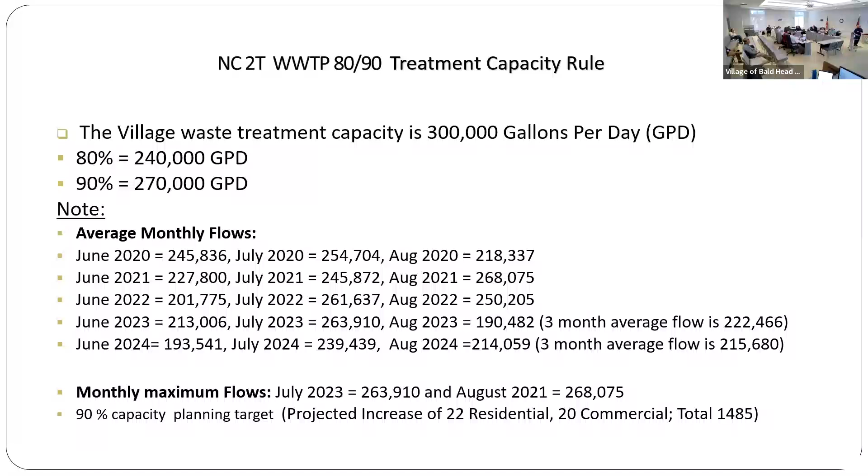Here you can see the percentage, 80% in the top slide for 2020, and then we've come down to 72% for '24.

Also, you'll see the notes off to the side. Our average is for 3 months. I have that document here, where we've agreed with the state that we would look at our highest 3 months of the year because of being a seasonal facility. Though we have a year-round population, we only gauged our highs by that. We would never exceed the 80/90 rule, and in all fairness, we could exceed it in the summertime and then have to all of a sudden have a moratorium on top of us.

We don't want to do that. So what we do is we guide ourselves with the highest 3 months of the year, which is June, July, and August.

We've been working on the premise that there's about 35 REUs per year. This year we broke that, we're at 42. Just for general knowledge, the reason we exceeded that was because of the current commercial development and those additional REUs, or we would probably have been under the 35.

We are approaching 90%. One other thing to mention, yesterday Tony talked about this last bullet here, the expansion permitting window.

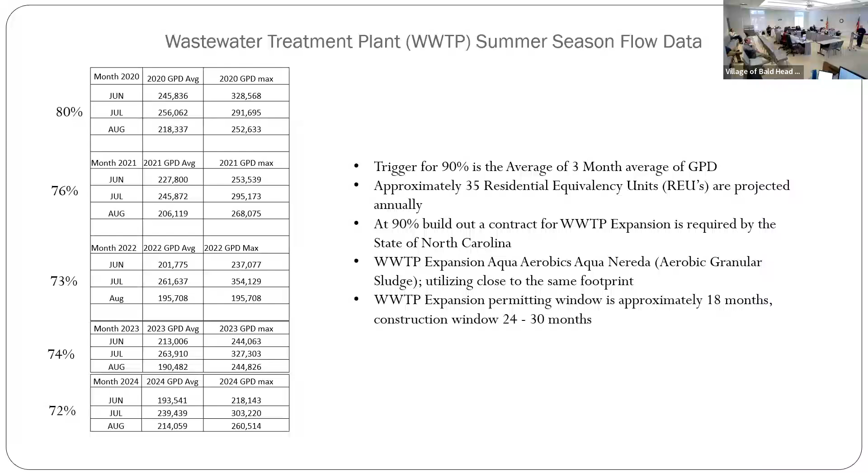We're going to start reporting average flows for the wastewater treatment plant monthly, as requested. But this is our start, just to give you an idea of where we are, where we've been since COVID. Any questions?

Yeah, just on permitting. So at 80%, we have to be under design. At 90%, we have to be under contract, awarded bid, construction.

So hypothetically, we don't hit 90% for 5 years, we're sitting on our design. I mean, we pulled the trigger, but we had to. We pulled it back, but really concentrated in '22 because we thought our numbers were going up. And when I'm looking at '24, we're lower than we were in '20.

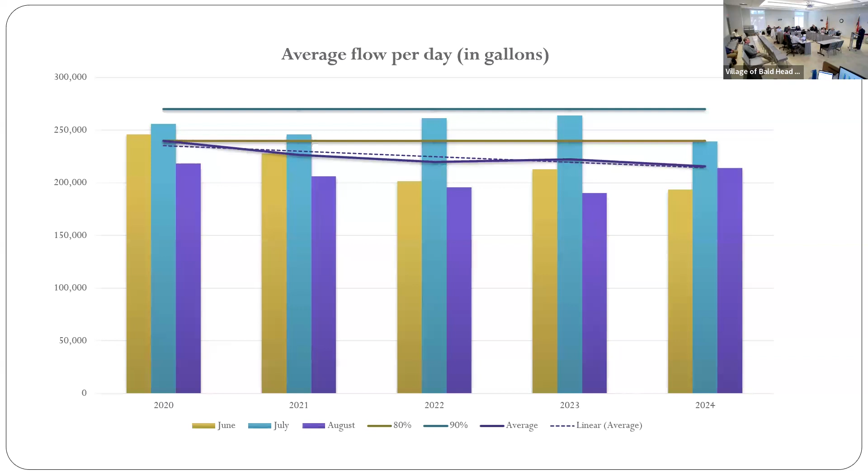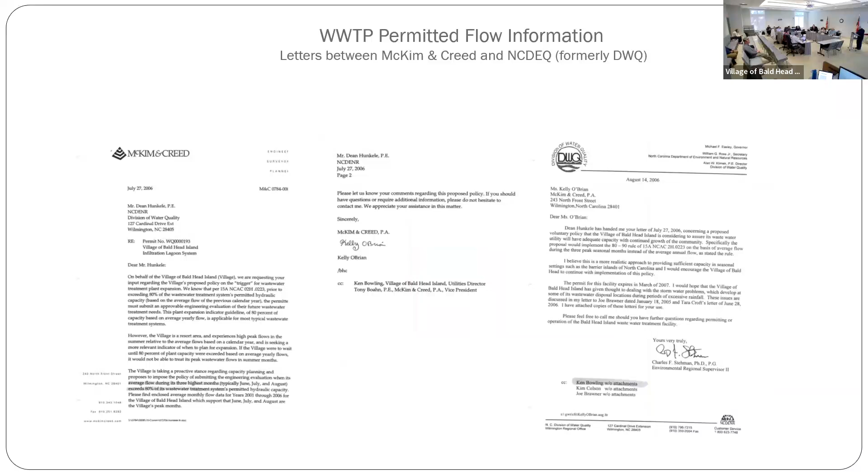Currently we're approximately 88 million gallons annually. And if we look at 2462, which is 2,462 REUs, we'd be looking at approximately 150 million gallons annually. That's what Jim was talking about yesterday, about us being able to make sure that we're being most efficient.

With what we have, and then see where we'll move forward in new well fields, technology. Eventually, maybe, we've been pulling from the freshwater aquifer lens on top. There are other options, we can go deep, desalinate. So there are other options in the future if we need them. And we also have the interconnect.

I like to keep that interconnect flow between 20 and 30%, keep that percentage the same. I've shared that with Brunswick County. That's where we'd like to stay moving forward. And of course, it's always there in case of emergency, which has come in handy.

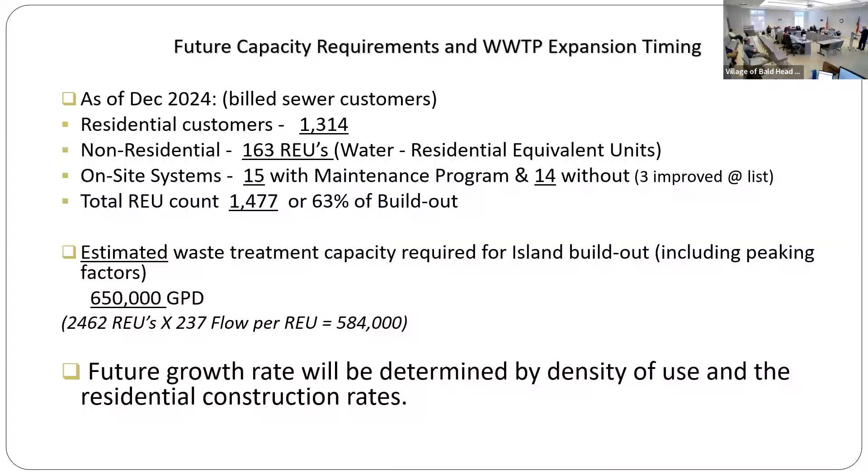Water capacity - I've covered most of this, but I had this slide to remind me about PFAS. We have done PFAS testing. I've attended all the state workshops DEQ has offered in Wilmington. We've done testing predominantly on the water side, but also some wastewater samples at the treatment plant, in the weir in the tertiary treatment area, just before it leaves the plant. We haven't done testing in lagoons or sediment, but we know we have high concentrations of both PFOA and PFOS at the tertiary treatment area, which naturally means it's out there. So the issue we talked about is real.

But if you think about it, PFAS is in everything - it's in packaging, it's in cosmetics. You take a shower, you rinse something in the sink. It comes from a lot of different sources, not only the source water.

Yeah, no, I get that. So we have a high concentration in our wastewater. Going back, we're doing a better job of testing at the tap to make sure we're not putting it out through people's tap water. Well, this is just another tap though, right? And in that tap, we are knowingly putting it in, and that's why we did highly concentrated testing there. We didn't test the outflow from the reject water from RO, but it's only a deduction. I understand, perfect, thank you.

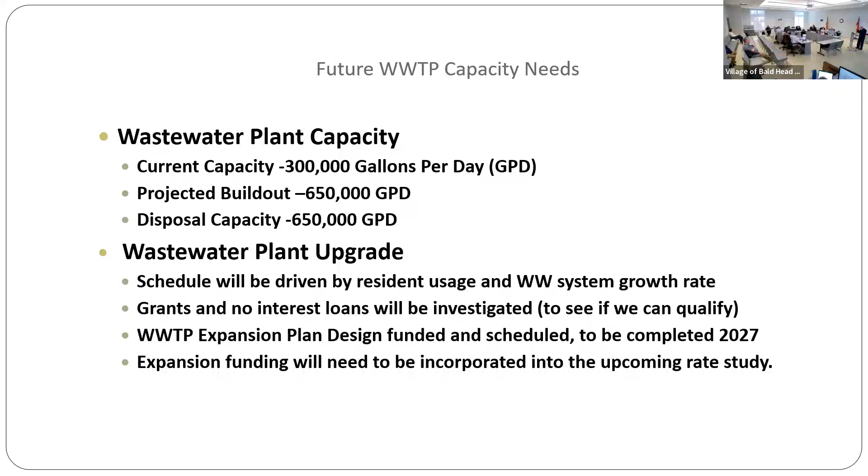Next slide, please. The next slide I'm gonna wait on, but can we go down to utilities capital needs? I think it's towards the end. Right there - now I gave away my whole slideshow.

Just to talk about utilities needs: we're looking at replacing the vans. We have gotten one pickup from public safety, thank you for that. These are some other items we'll be looking for - a confined space oxygen meter for confined spaces, primarily the lift station areas, Liberty pumps for lift stations, E1 and Barnes controls for the grinder pumps, and a reverse osmosis cleaning skid. We haven't had a skid replacement in a number of years - that helps us clean the ROs in the water plant.

We are trying to replace the balance of concrete in-ground tanks we've used from the old low pressure system, which we converted to wet wells for grinder pumps. We have no way of keeping those secure in a flood situation, and there are 40 or so of them. So we're looking at the Heritage floodplain wet well for those and the pumps that go with it. We want to take those 42, get a contractor, bid it out, and replace those 40 or so old concrete tanks with the floodplain wet well so we can control things during a high water situation.

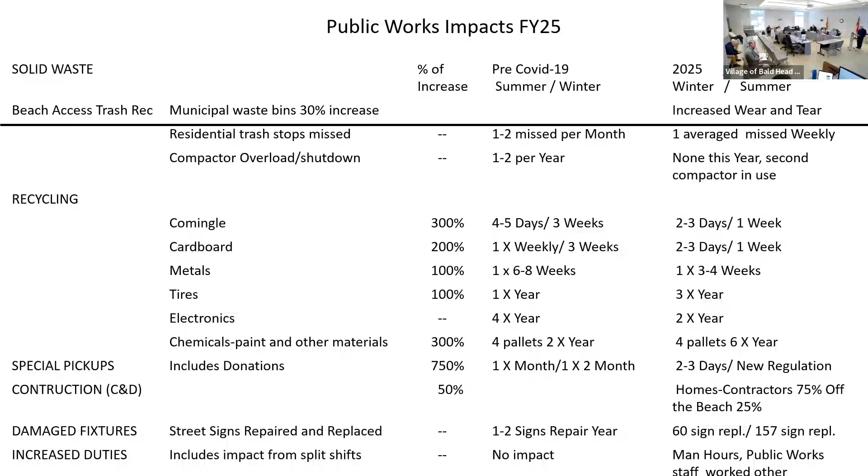Next slide, please. And the reason for that too is when we start talking about landscaping of parks and right of ways and things like that, I don't want to have that discussion.

This is the roll-off truck. I mentioned earlier about what we spend traditionally a year - about 200,000 a year on waste disposal of 40-yard and 30-yard containers outside of what we have, and then about another $120,000 a year on sludge removal. Two things the roll-off truck could do for us. The cost is about $280,000, which we split over a couple different programs, 140 apiece. And if you look at the public works wish list, there's also some containers, about another 40,000 to buy the physical containers themselves. So this was something we had on our vision board, and we continue to, and I'm bringing it back again during the budget season this year.

Any questions? Next slide, please.

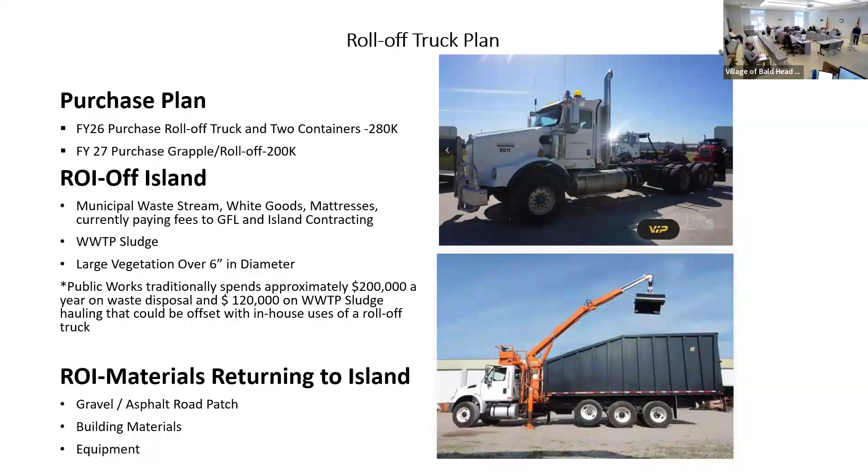When you do this work and decide what needs work, are you also looking at a schedule for digging up the road? Like if you're installing a new pump or something that would damage new pavement, are you coordinating this? This review's done annually, so it picks those things up - we don't add them in as they happen. I was thinking about the new pump, some kind of switch that was put in on Federal Road right at the corner to keep water flowing to the markets around here.

That will be done by a temporary patch - it's doing it as the compaction is good, and depending on weather. Generally for the bit that was compacted in lifts, it will be ready sooner than later as far as being temporarily patched, and we'll do that in-house. But we wouldn't want to be paving Federal Road in advance of doing whatever equipment you put in there.

Just from an aesthetic point of view, driving down Edward Teach, the view right down into that whole thing, and now we're talking about clearing it up even more. So looking in from this direction, I'm talking about the normal golf cart traffic going in front of public safety, and at some points you're just looking through the entire contractor service yard. There should be a vegetative buffer of some kind.

I'd just like to see that thrown into the mix somewhere too, out there or even near the back. We're just cleaning this up because we had to, it hadn't been cleaned out in years. We had to reshape it.

This is a stormwater containment area. It was so overgrown we couldn't get in there, so that's why we cleaned that up. Next is gonna be the tank area, really need to clean that up and take the old fence out of there that's been there.

I'm recognizing the need to do what you're doing, and I'm just looking at how do we introduce a buffer so that your need can still happen. I got it, but I'd like to supplement what we're doing in some way to create a buffer. It needs to be more hidden, like go to any major waste facility, anywhere you haul crap to.

It'll be landscaped in the front where the gate is, and then once you enter the property, you can't put lipstick on a pig. So buffering along Edward Teach to hide it, build a plan with some berms, some plantings or something, just along Edward Teach. I'd say on Federal too, toward the east end, because we did do some berms, but then there's a section that's still pretty open. Driving down this way, you can look into the property.

My thought process is more along where we have a handful of palm trees at the end of public safety right there, even landscaping closer to the public safety, that area that's wide open there, if we can, that'd be great.

You say natural or fencing? I'm saying natural. Anyway, we can easily plant that area more.

I think there's a whole other thought process that has to be added to what you're doing. We've identified it, we know what it is, and we've been concentrating on shaping this rather than any blinds or anything. They could happen simultaneously, but we've just been focusing on this, making it reasonable, now because of the money available and everything else.

So once the new gate is up there, then people wanting to dump in those dumpsters will have to come to current restrictions.

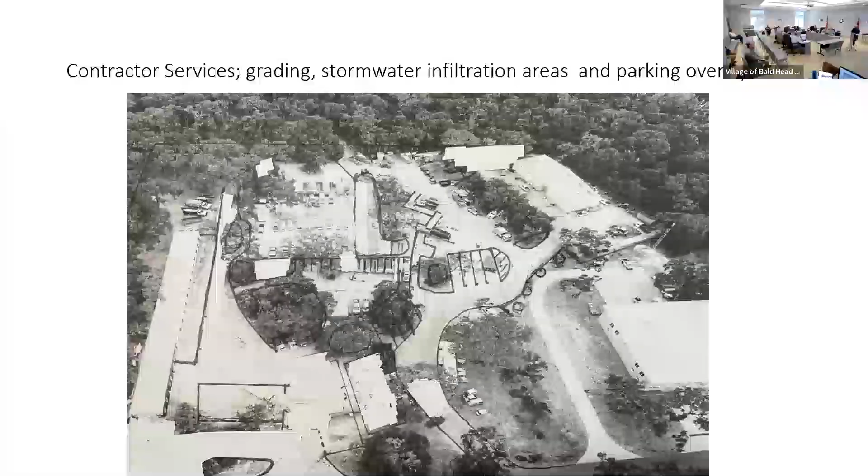Next slide please. We have the gas pumps installed, and you'll see more organization within contractor services, with both the poles and some of the ribbons on the ground designating spots. Once we get everything cleaned up, you'll see a lot more of this, and you'll see designated spots.

We are getting better at giving people assigned spaces. We are doing better at tracking people that are there, that come there overnight temporarily. Fuel pumps have been working well.

We have one more component that we'd like to install that would help on our side, and that's a patch between our bookkeeping system and the gas operation, diesel sales operation themselves. We continue to work on that with the vendors. It's been in their hands. We don't really have any control of that patch, but once that patch comes, it will help my staff be able to do less bookwork. The reconciling will be done automatically, go straight to the program, and that will help free some time up.

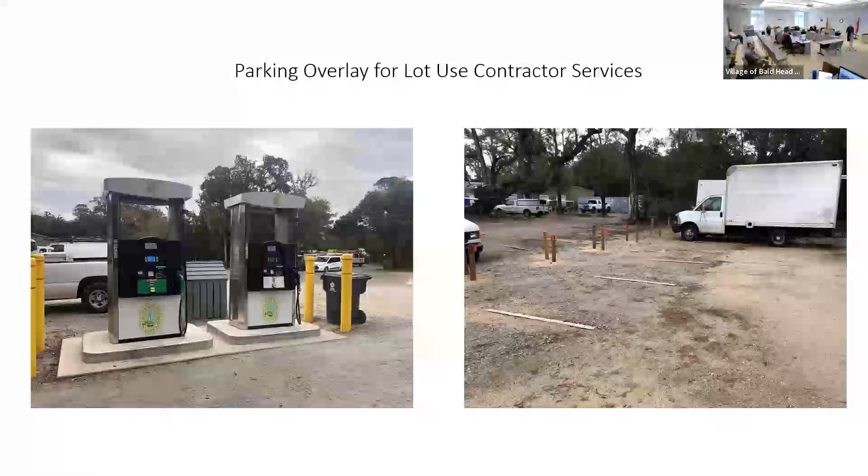Any comments about the beach access points? Concerns? Not about that, but it made me think of a question I forgot to ask earlier. I thought there was some discussion about getting some grant money for paving. Is that still an ongoing effort?

We were exploring funding and earmarks for that. We had a little bit of an update on that yesterday. But there's still some hope there because of access, I guess, use. There were some former senators, congressman excuse me, talking about it.

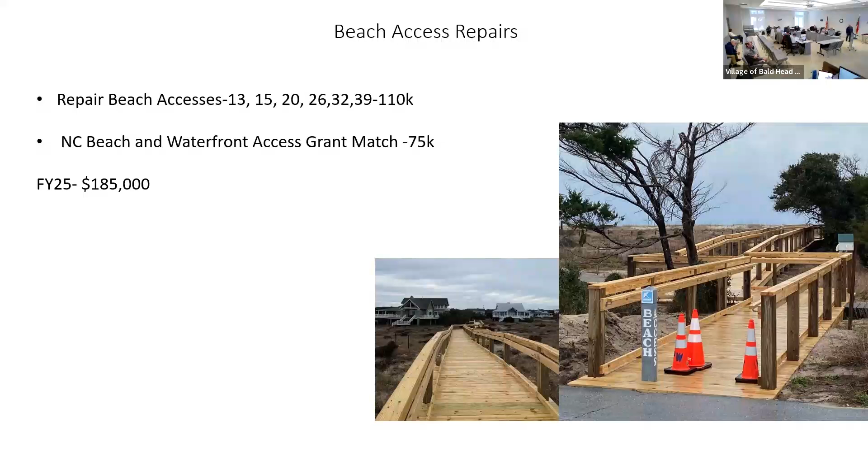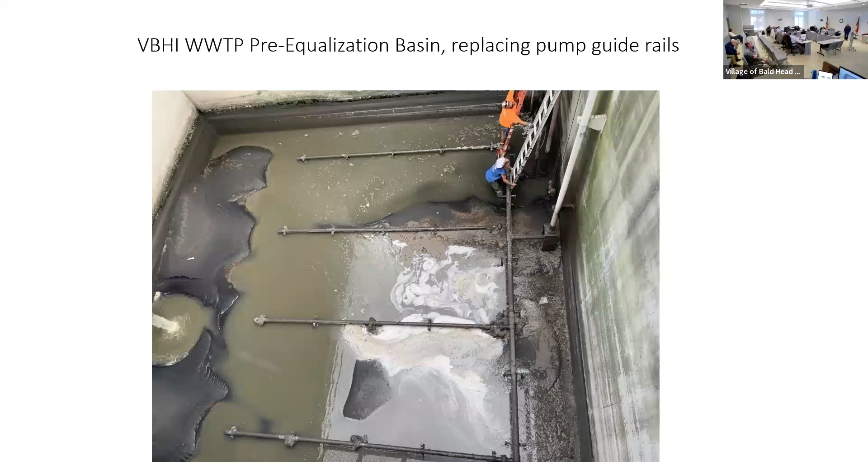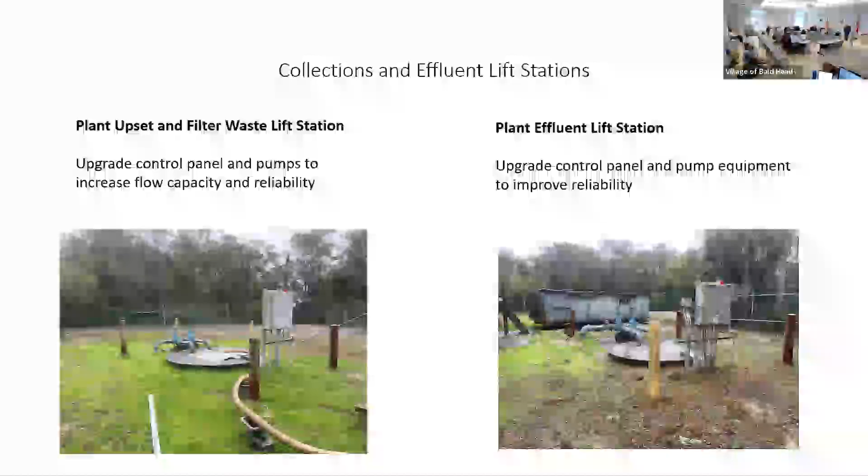Next slide, please. These are our two lift stations. This one is for the plant itself, and this is a distribution effluent lift station that sends stuff out to the lagoons. They are old, but they were able to keep up with 850,000+ gallons in that one day during PTC 8. They are still areas of concern that we'd like to work on that aren't right now included in the total price for the wastewater plant.

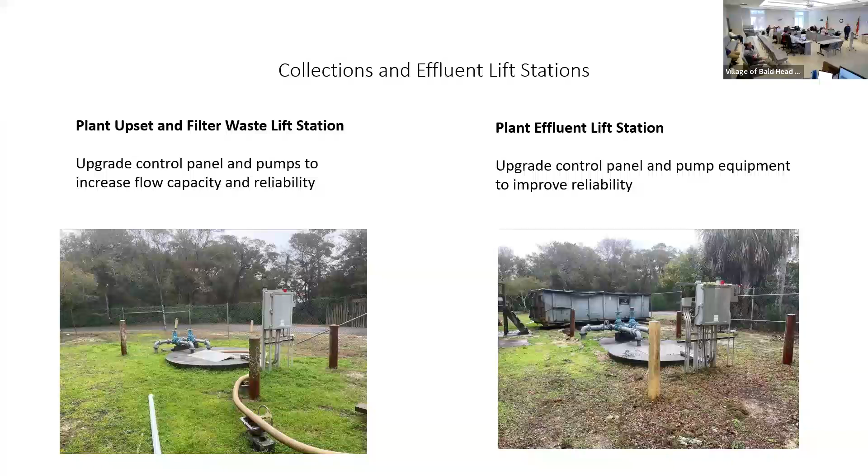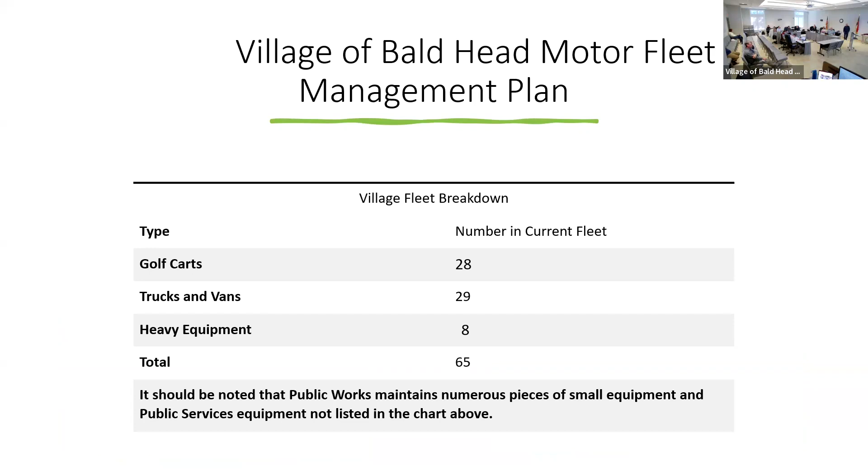Did you guys already go through the conversation with the review board? And have we talked to the chapel and the - I have not. Okay, so this is one of those, going back to communicating back and forth. The chapel and the lighthouse have the same fencing. For us to be replacing our fencing and not have them replace all the fencing, that whole area needs to be addressed. So that'd be a conversation.

Even if it's identical picket. I think they have an identical one. Yeah, I mean, even though we - if we - you're just saying for notification purposes, not necessarily. Yeah, notification, we're not gonna be doing - yes. No, but it would be a project that makes sense that it happens all at once for everybody. It's not cheap though. Yeah, I'm sorry, I don't know that, I think there's a notification to them that, hey, we're changing our fence. But I don't think, if we elect that that's something we want to invest in, I don't think we slow down or speed up because the chapel or the lighthouse wants to do it now or wants to do it later.

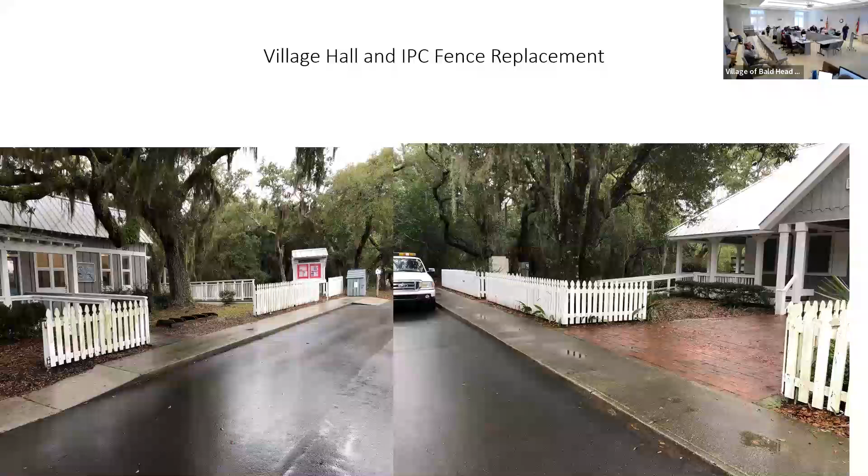Wayfinding program - we've been using the wayfinding program that was done a number of years ago. That seems to be working. We do get comments and we try to shift gears to address the comments as they come in. I've said in previous meetings, if anybody has any concerns or comments about the signage, please bring them to us so we can review them and make sure we're doing the best we can.

The roll-off truck is here because we help with different types of hauling, both on and off island. I didn't mention bringing stuff back, but yes, it can be used to bring rock and other materials back to the island. Right now we use the F-250. When we take stuff off to donations, we always bring stuff back on, so we try to make sure that trip is all it can be. Fencing, grading, asphalt work, services, the contractor services area is ongoing.

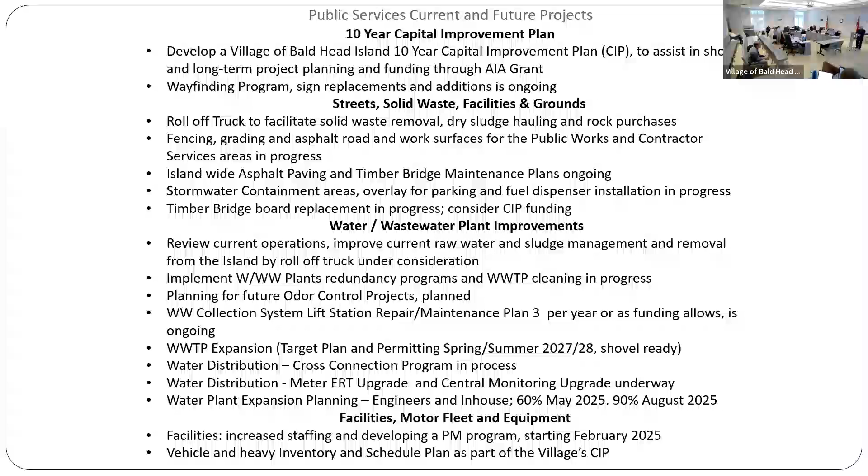Again, we've already had this conversation, but I put it in here to remind me about talking about the funding for the repair on Timber Bridge. We have sealing, painting, and staining that needs to be done on a regular basis. We've done the board replacement. We're going to do a running surface, but we also have the under-superstructure that's going to need attention. It has been looked at recently, it looks good, but that's something that's going to need to be looked at on a regular basis.

Now, did the running surface get approved? We are still working with it by an engineer, but I don't have a stamp on it yet. Okay.

JP, what are you talking about in terms of an annual set aside for the bridge? I have to do a little bit more homework. I think quite a few of us are on board with the notion of let's just have a plan to keep funding it regularly, to keep it in good shape. But I have no idea how aggressive we need to be on that. I think the best solution would be to put some funds aside for an engineering firm to look at my holdup on the running surfaces, to pay for that seal approval.

So that's been a challenge. If we could look at that and look at some long-term planning, Withers is our on-call doing our CIP, maybe we have them take a look at it and put a number together for us. Unless, Zach, do you have anything to add?

No, I think that's a good plan. Well, we don't have to study it to death. We know the boards are 3 to 5 years, right? And you know about what that costs to do. You could at least capitalize that, the board replacement. You gotta factor something more for the underpinning and the surface covering, but we have some known historical run rate with doing this.

It's not an unknown. The surface stuff we're gonna put on should reduce the time which the boards have to be replaced. That's the idea behind it. That's HDPE, so we should get good wear out of it. Question did come up, is it skid resistant? It is for automotive use and it does have a skid resistant surface on it.

So yes, we can do that, but with modified. Whether we did it or we asked Withers to do it, we're gonna get some representation of how long this surface is gonna last. Just lay it out, right? I mean, they don't have some magic sauce that we don't have at our own disposal of what we've been putting into it. We've got experience. Yeah, we've got experience, the only X factor is the new surface. And if we plan based on our experience, we'll only do better than that because the road surface will be better.

But we do have to be under- I can bring those numbers. It's just been said to me from time to time, well, you have a seal on that. No, I don't have a seal on it, but we do know that. I get it. Next slide, please.

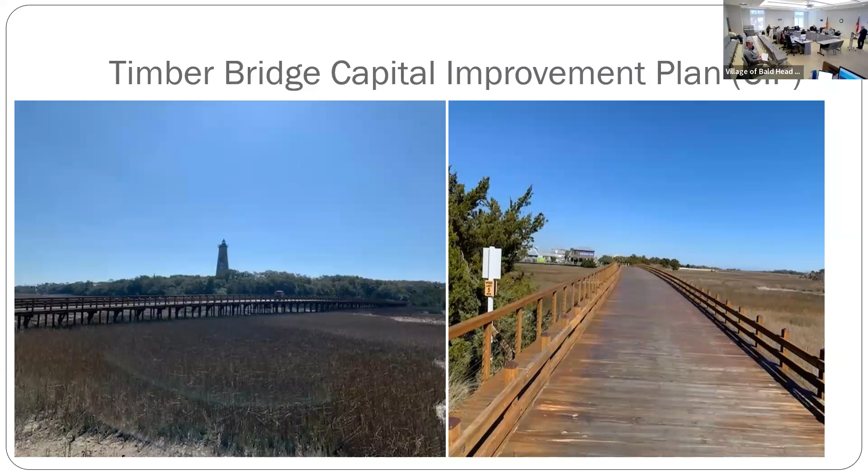And we could use that knuckle boom for other things. So we thought about doing that in 2 phases. We buy the truck and the containers one year, maybe a year or two later we could buy the grapple loader. So like I said, it comes in one unit. You pull it up in the back of the roll-off truck. It's the dump container, the boom, it's all one piece.

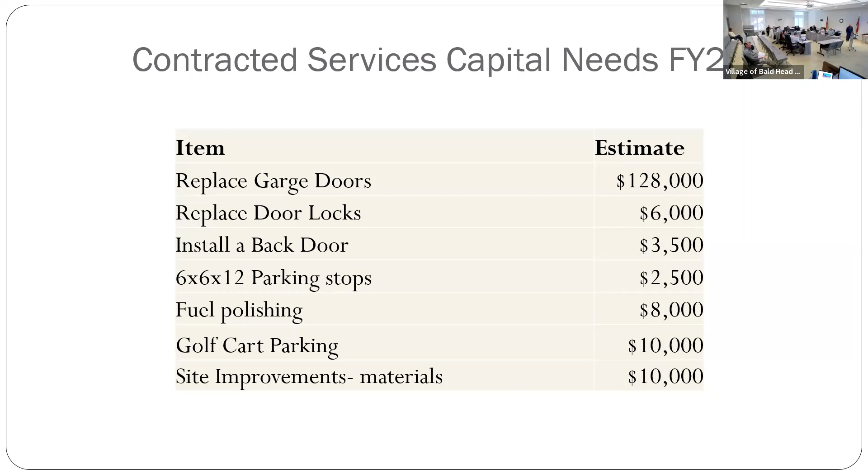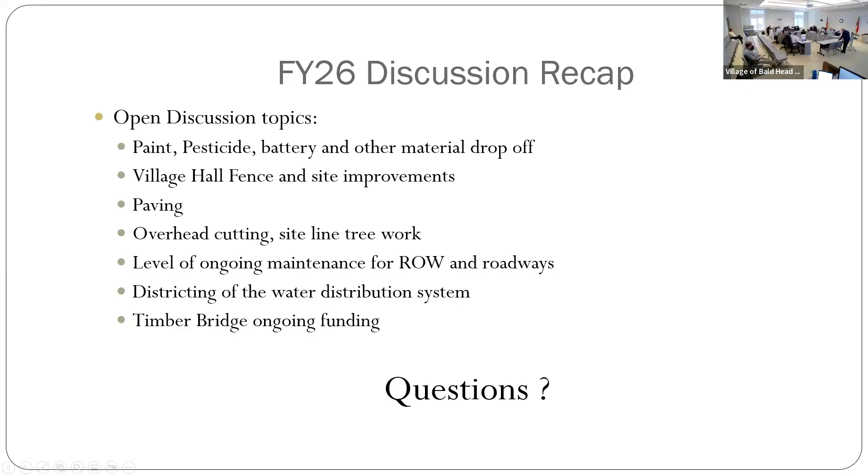Is the national standard going to be set? Yeah, there's a new standard, dropping into parts per trillion. So PFOS was 2.9, PFOA was 5.8. What was the old standard and what was our reading then? What's the new standard?

The slide I presented maybe last year, or one of the meetings last year, showed the EPA was going to recommend 4 parts per trillion, with a limit they'd like to eventually get to of 0. I could dig up that slide and present it at the next meeting, or even this afternoon's meeting if you want, or next month.

But in short, just recently - I don't know if you've heard on the news - all the PFAS regulations have been rolled back. That doesn't make us feel better that EPA is gonna do the enforcement. But that 2.9 you're quoting, what is that? 5.8 and 2.9 parts per trillion.

Okay, so it's 10 or 100 times what the proposed EPA standard was? Well, it was 4, so one is under and one's over. Got it, but not by a lot. But the eventual goal was 0. Yeah, got it. But now, that won't happen. No telling what's in the sediments.

Yep, where the alligators live. Have you done any testing from the different sources of water to know whether it's aquifer water or river water? We've done some raw water testing and some tap testing. I think we've done more raw water testing than tap testing - I have all that data, let's see.